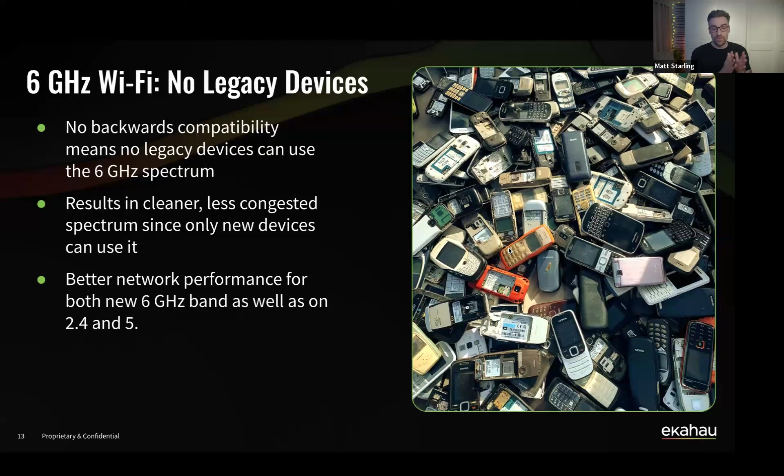When it comes to security in 6 gigahertz, WPA3 and protected management frames are mandatory. And you go from using WPA2 pre-shared key in your personal networks to using SAE, which is more secure as well. So it enforces things like this, which means that your client devices are going to be more secure, less susceptible to deauthentication attacks from people trying to get your client devices off the network. And it's going to make not only an improved Wi-Fi network, but a more secure Wi-Fi network as well. So lots of benefits for moving to 6 gigahertz.

And then I wanted to talk about Wi-Fi 7 because even recently Cisco just announced, I think 2 days ago, their Wi-Fi 7 access points. HP Aruba have got their ones out. Juniper Mist, Extreme, Ruckus, etc., all have either announced or launched their Wi-Fi 7 capable access points. And even the latest iPhone 16 supports Wi-Fi 7. So if your metric for measuring client devices on your network is Apple like me, then yeah, from iPhone 16 is Wi-Fi 7, iPhone 15 Pros is 6 gigahertz Wi-Fi 6.

So what's new with Wi-Fi 7? So first of all, if we just quickly talk around multi-link operation, and effectively, if you think about a traditional Wi-Fi network before Wi-Fi 7, how that would operate is you'd have a client device connecting to an access point on its radio, but it'd be on a single radio. So if you connect on 5 gigahertz, you'd be having that communication on 5 gigahertz.

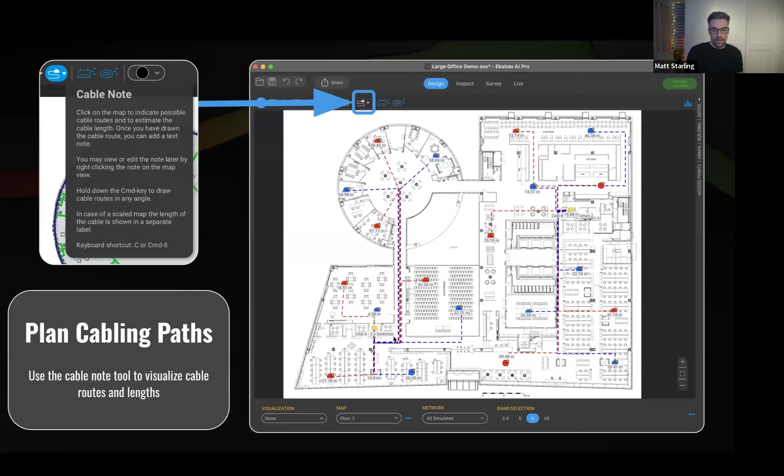So I wanted to give you a quick way of visualizing an outage when you can plan that in Ekahau. So what I've done here is I've effectively done half the APs in red, half the APs in blue, and planning for the red APs to go to one switch and the blue APs to go to another switch. And what you can actually do in Ekahau, which I think is probably one of the least known features or least used features in Ekahau, is you can actually plan cable lengths and cable runs using the cable note feature. So I basically just simulated having two cabs with two switches, running blue cables to the blue APs, running red cables to the red access points.

Does anyone in here currently use the cable note functionality? Or was it just me that likes to draw pretty cables? I don't know.

Yeah, and now we're bringing up 2.4 gigahertz. Unfortunately, 2.4 is here to stay in most of our environments for at least the near future. There are just too many IoT devices that rely on 2.4 that can only do 2.4, and they're usually, at least in my experience, security devices or some type of HVAC or something that no one really touches. No one really knows that it's even existing until it doesn't work. And then you have to troubleshoot and try to figure out what the heck this device is.

But there are a lot of environments where 2.4 is still around. So when you're designing your wireless networks, you still have to think about 2.4. You still have to keep that in mind and support the legacy devices, unfortunately. Yeah, definitely seen that a lot.

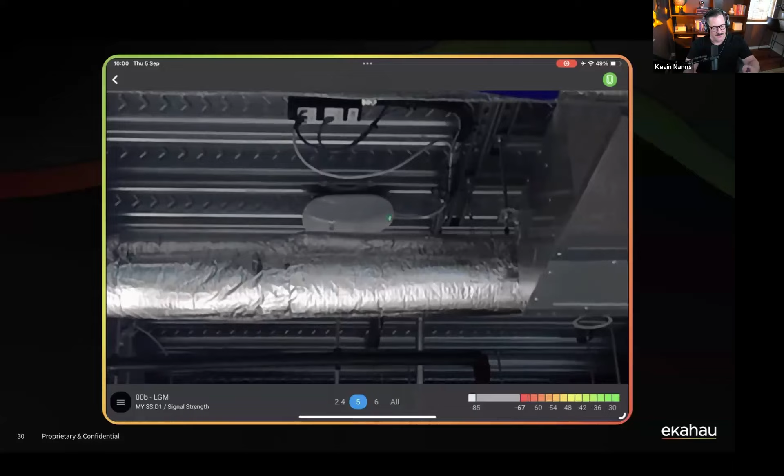There's been many a time where I've come in to do the active survey afterwards and found an AP placed exactly where I told them to, but there have been additions that were not on the blueprints. There's been duct run across, a cage, some kind of interference, an AC unit right next to the AP, that kind of stuff that can just kill your design.

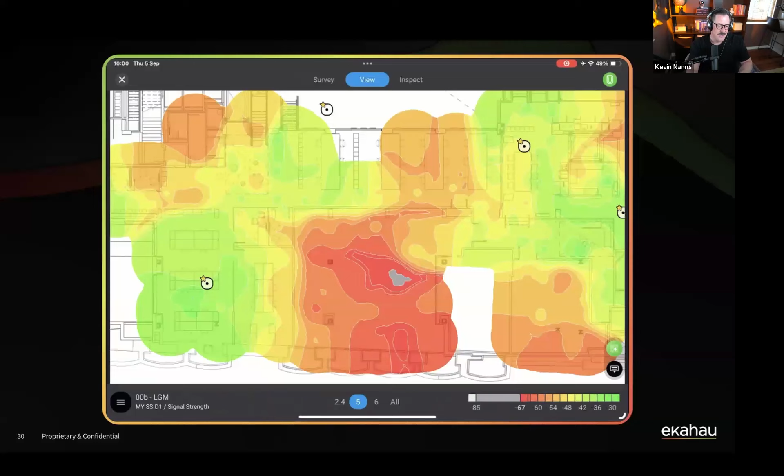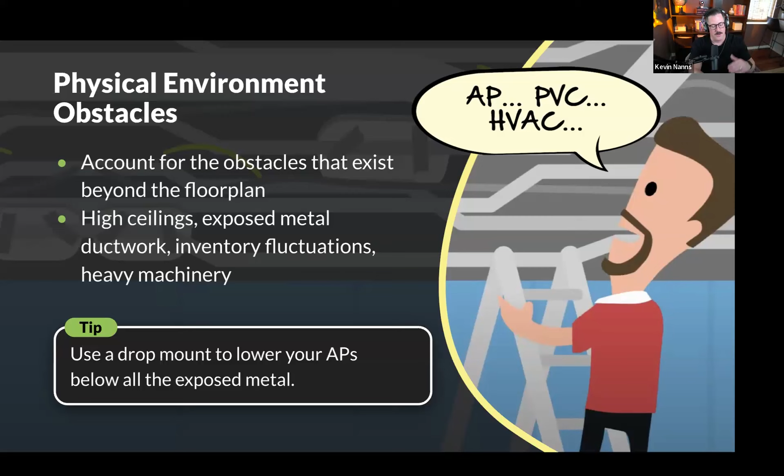And so going back and doing an active survey and looking for obstacles, looking for things that are exposed and causing interference is really important. And there are certain ways to get around that, such as using a drop mount, as I said, to lower it below the obstacle and that kind of stuff. And that's really important, especially with the new APs coming out. Mm-hmm.

And scheduling downtime. I say this all the time to my coworkers who are afraid of doing stuff, that you can't make an omelet without breaking eggs. And leadership has to know that. Users have to know that. If they want the newest things, if they want upgrades, if they want to have stability in their network, they have to have some downtime. And scheduling that in your environment could be very, very difficult depending on your environment.

If you're in healthcare, or like I have fire stations and police stations. I work for the government. So I have different things that really can't go down, but they have to. So it's balancing that, doing your change requests and having leadership back you up, but it can be very, very difficult. When you're doing these upgrades and you saw how much could be involved in your environment, you're going to have to let leadership and management be aware that things are going to go down, there are going to be outages.

For sure. So let's take a look at how you can use Ekahau to plan towards upgrading to a 6 GHz network, whether you've got an existing 2.4 and 5 network, or you just want to design a brand new network from scratch. The two different approaches you can take with Ekahau are based on either measured data or traditional predictive modeling. And I'm going to give you some live demos of both.

But first of all, if you've got an existing network, an aging network that's just 2.4 and 5 GHz capable, how do we plan to upgrade that using this method? Well, a redesign is always going to start with a survey. And with Ekahau, we have multiple different survey methods to collect the data.

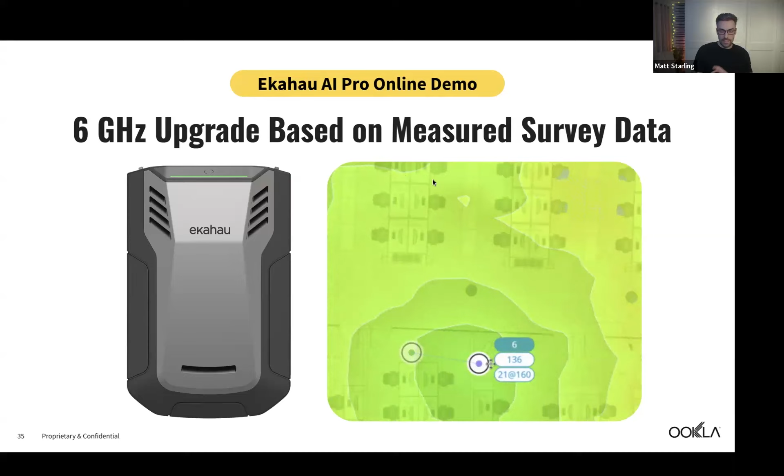So if you're not familiar with our new cloud landing page, I just wanted to give you a little bit of a tour on how you can access getting into AI Pro Online, because it does look a little bit different now when you first log into your account. You see all of our different apps up here. You have these tiles that you can either start a new project, continue where you left off, jump into Optimizer, or go into Insights to look at all of your projects.

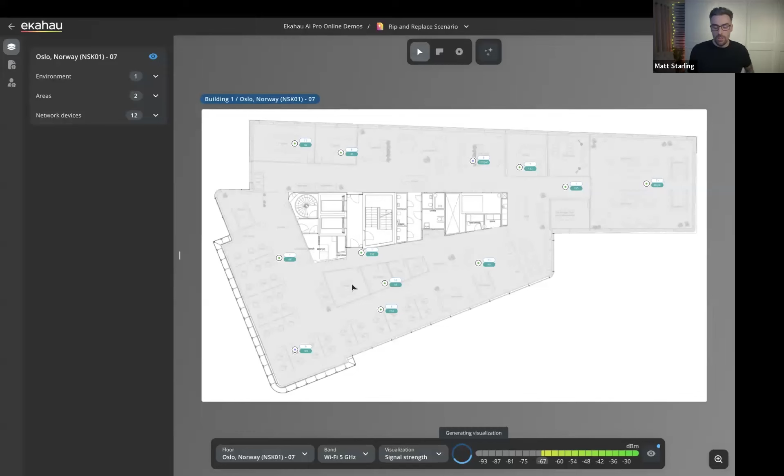But what I want to do is go into AI Pro Online. So I just simply click on that. It's then going to open and take me to here. And what I actually wanted to show you is a rip and replace scenario. So we've got a nice simple office here, and this is just pure measured survey data. So I've only done a survey, there's no walls drawn, there's no obstacles or anything like that.

The access points, they are HP Aruba ones, and they currently just support 2.4 and 5 gigahertz. And that's what we see down here in the bottom. So typically, if I wanted to simulate upgrading to a 6 gigahertz or Wi-Fi 7 capable access point, what I would have had to have done is import this into Ekahau AI Pro, our desktop, scale, draw walls, update the attenuation of the walls to be accurate, to reflect what we've got on site, and then place the simulated access point.

However, using this new methodology of just walking around with the Sidekick 2 and then uploading it to AI Pro Online, we use our AI machine learning to understand how RF propagates in your space, and I can now plan for changes without having to do any kind of manual work like drawing walls and stuff myself.

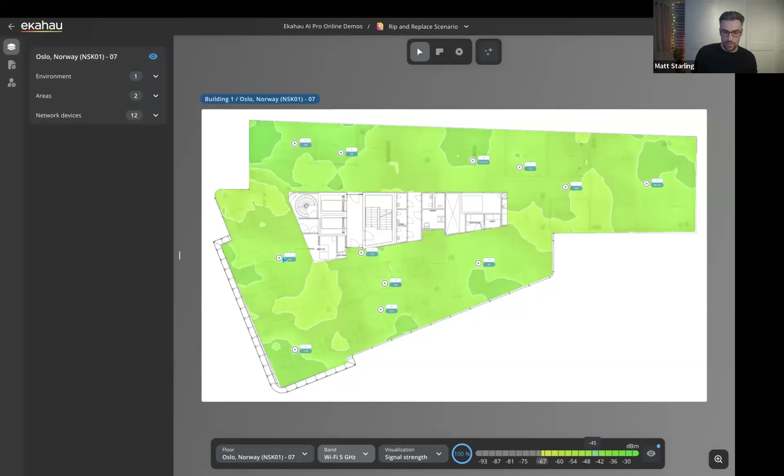So what I can actually do is maybe I need to relocate this access point. Maybe I want to move it from here into there. I can literally just grab it, move it, and put it anywhere I want, and you can see the heat map changes and it updates in real time, purely based off that real measured survey data, which I think is very cool. And if I decide actually, you know what, I don't want to install it there, I can put it back to its original location by hitting reset device and it will jump back there.

But what I want to show you is simulating that rip and replace scenario. So what I can do is just come into here, grab all of these measured access points that we found, and then I can actually ask Ekahau to replace them with a different model Aruba access point, and perhaps I want to change it for the 755.

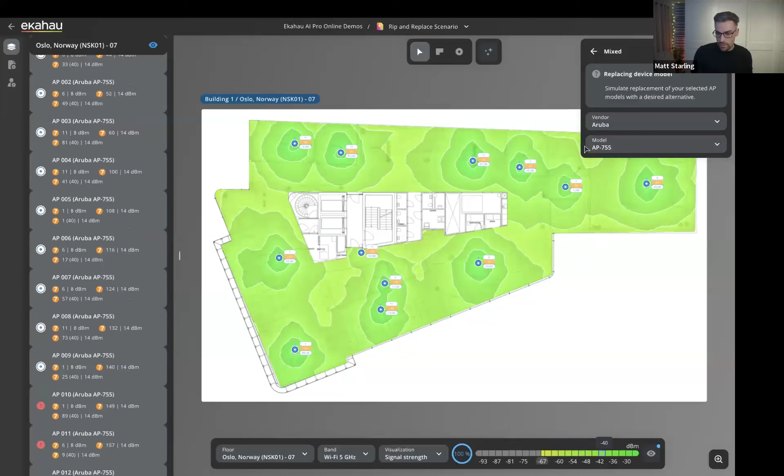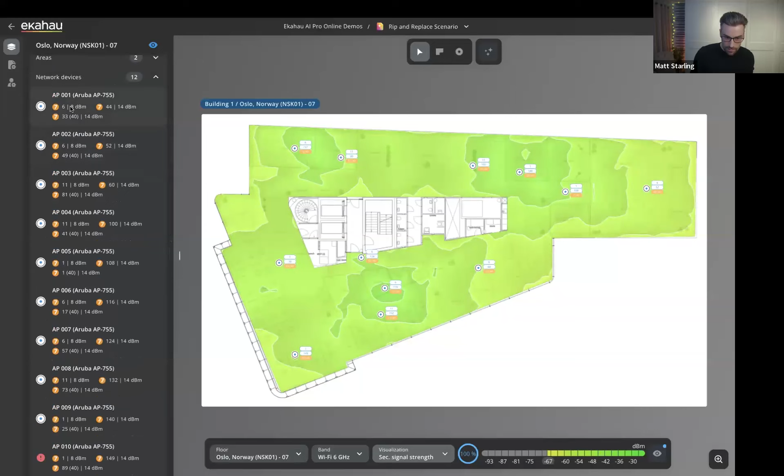So if I click on that, what you'll notice happen straight away, hopefully you saw that, all of the APs swapped, and now we have 6 gigahertz simulated data, even just from the 2.4 and 5 gigahertz APs that were there. So we can actually predict and show you what 6 gigahertz coverage is going to look like and see if this meets our primary coverage, does it meet our secondary coverage requirements? And also, notice on the left-hand side, we have the Wi-Fi 7 icons, so you can design for your Wi-Fi 7 APs.

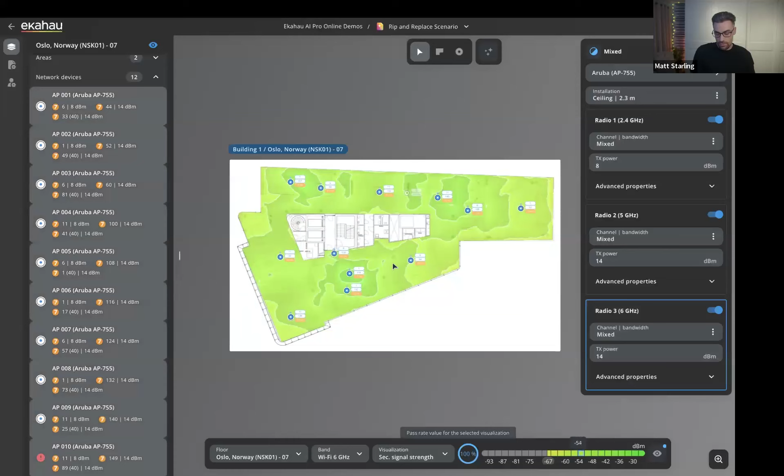And again, if I wanted to, maybe I don't want to have this access point over here. Maybe I want to move it to this location. I can still move the access points around and plan and account for changes in the space if I wanted to. Also, what I can do is I can actually just delete all of the access points, and I could just design the network from scratch using whatever model AP, but we'll stick with Aruba because why not? And their 755 AP, and I can just come in and place my access point and just move it around wherever I want. And what you'll see is these suggested locations that come up as well.

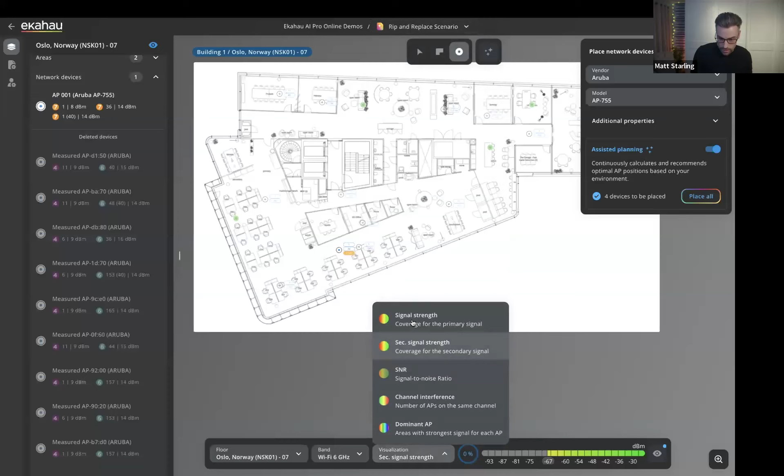So that's one method that we've got for designing and upgrading to a 6 gigahertz Wi-Fi network. Oh, sorry, you don't see any signal strength there because I've got it on secondary. And I can again just move APs around and plan for where I want to place access points using this method. Or perhaps you want to just design a network completely from scratch, or maybe you haven't got access to the site yet to do a Wi-Fi survey.

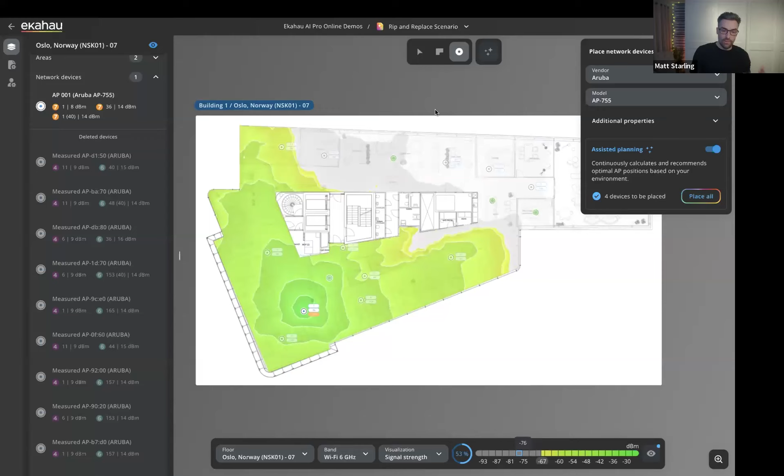So what I can actually do is I can come into here, click on the new project, and let's call it Ekahau webinar demo. And that was in Norway.

That site, but I'm in the UK, so let's pick the UK, and then I'm going to hit continue. And actually, I'm going to give you all in the audience a chance to choose what we want to design for. So I've got 4 floor plans here. They're all either PNG files or a JPEG file of a hotel or some different hospitals. So which one would you like me to use for our traditional method of designing?

So we've got hospital floor plan 1, 2, or 3, or we've got a hotel floor. Okay, hospital plan 2, hotel, hotel, hotel, H1, hospital 2. Okay. There's a lot of people putting in some options there. Is there a pub? Maybe if you send me a floor plan of a nice pub in the UK, we can go with that. So I think a lot of people wanted either the hospital floor plan or the hotel. Kevin, you can have the final decision, this one or this one. What would you like? I'm thinking hotel. Hotel? Okay, we're gonna go with the hotel.

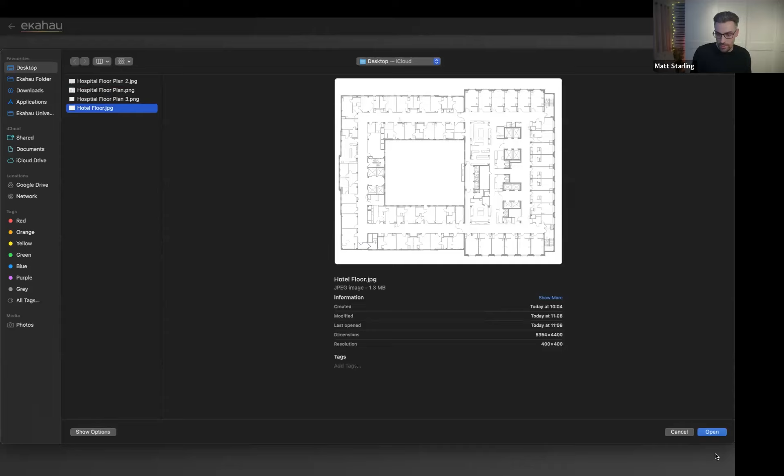So I'm going to simply hit open and it imports. And then the first thing I need to do is give it a scale. So I know I'm going to do something very bad here. I shouldn't use a door to set my scale. We should use something longer and proper, etc. I agree. Don't do what I'm doing. When I go there, I would measure it, of course, but I don't have anything else to scale it better. So please don't judge me too much.

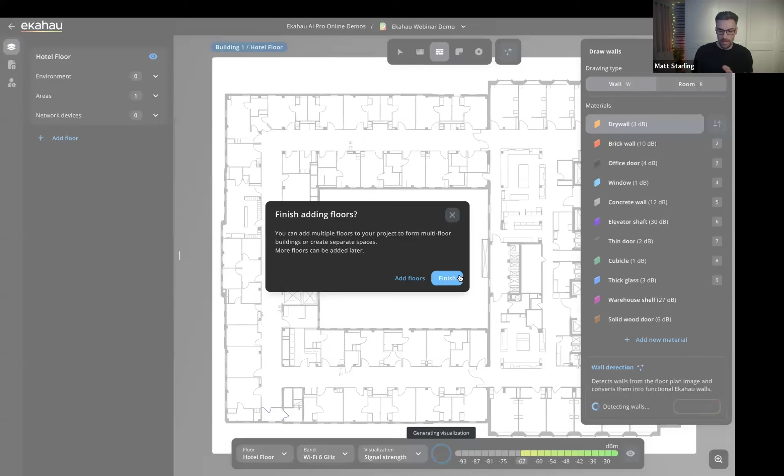So I'm going to hit finish now because I don't have any other floors of the hotel. We're just going to design for this floor. But remember, this was a JPEG file. So I'm just importing a JPEG. And the reason why I want to highlight that is because I have a question for you all. If I was to draw all of these outer walls and interior walls and doors manually myself now, how long do you think this would take me? Or actually, how long do you think it would take you in the chat?

Days, an hour, 80 minutes, too long, 20 minutes, a friggin' day, an hour. Okay, so a lot of people were saying various times. Maybe we're finding out in the chat who gets paid by the hour here. Some people saying this will take a whole day to draw all of these.

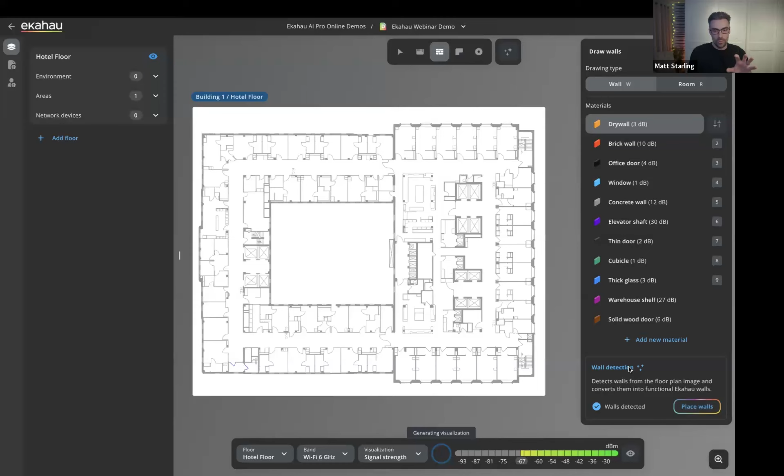Okay. The reason why I wanted to highlight that is because now, did you see our wall detection has finished? It's looked at the floor plan and it's detected the walls. And now if I just simply hit place walls, all of the walls have now been drawn for me. And we picked this floor plan completely at random. If you had a CAD file or a PDF file that has the layers determined properly, we could have imported that, read those layers, and then drawn the walls for you. And we can still do that, of course.

But I can probably count on one hand, out of all of the hundreds or thousands of Wi-Fi projects I've worked on, when I've actually got good CAD files that I can actually use. Most of the time, I end up converting either CAD to a PDF, PDF to a high-res PNG or JPEG like this. And this has now saved me a whole bunch of time.

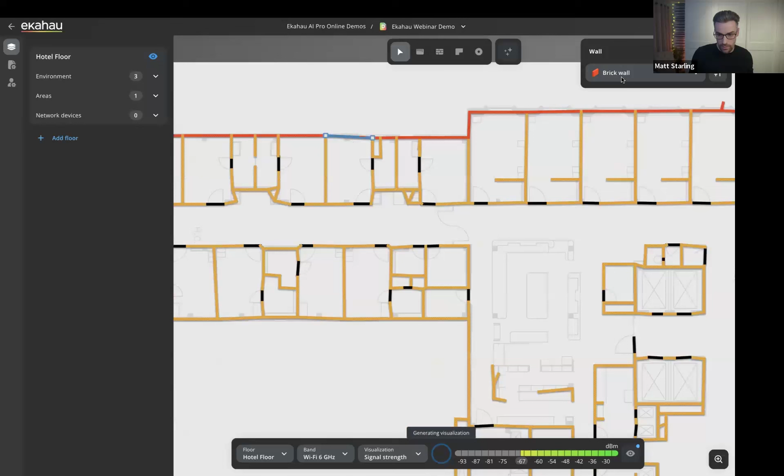And of course, we're making some assumptions here. We've drawn brick wall for all of these outer walls. If I click on this, you can see it's a brick wall. And then interior walls, it's a drywall. And look, we've even drawn the doors. That's pretty damn good, I would say.

And of course, some of the things are not 100% perfect. There are probably not any walls here, but I can just come in and get rid of them. And I could add some, like it's missed these doors here. Great, fine, no biggie. It's not going to take me any time at all really to come in here and update these walls and change a few things as and when I need them. So this is going to be a huge time saver for you if you're working off of PDF, PNG or JPEG files, which I personally think most of us probably are.

Stop improving the workflows, we charge by the hour. You can still charge by the hour, but now you can just do something else instead, like watch Netflix whilst you said you were taking 2 hours or 2 days to draw these walls.

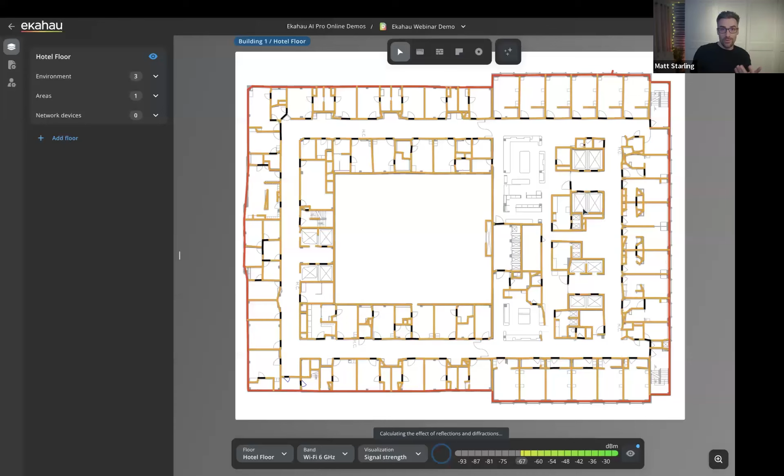Next thing that I would do is I would define an area.

So I would tell Ekahau, hey, this is where I want to see the coverage, so I can move this area in and I can tighten it a bit to be just specifically around where I want to see the coverage. Or I can just ask Ekahau, hey, place these areas for me. And when I do that, it automatically snaps to my actual floor plan area. Again, I think that's super nice.

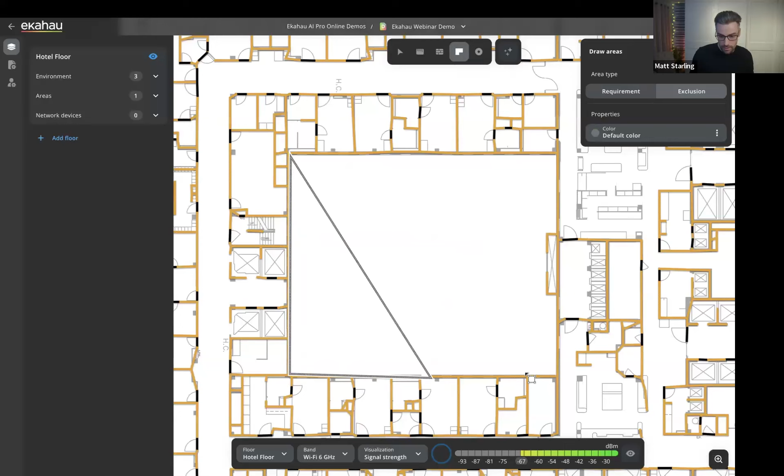And then the last thing that I would probably do quickly is just go to my exclusion area, come into here and just define where I don't really want to see the coverage, like this big atrium or courtyard. And once I've done that, I've now got my exclusion area defined. I can now come in and start placing my access points.

So Cisco announced recently their Wi-Fi 7 APs. Why don't we design for Wi-Fi 7 in Ekahau? Because we can, and so can you. So I can just come in here, pick one of these Wi-Fi 7 access points. And then what you'll notice has happened is we have this thing here called an assisted planner, and it now says that there's 13 devices to be placed.

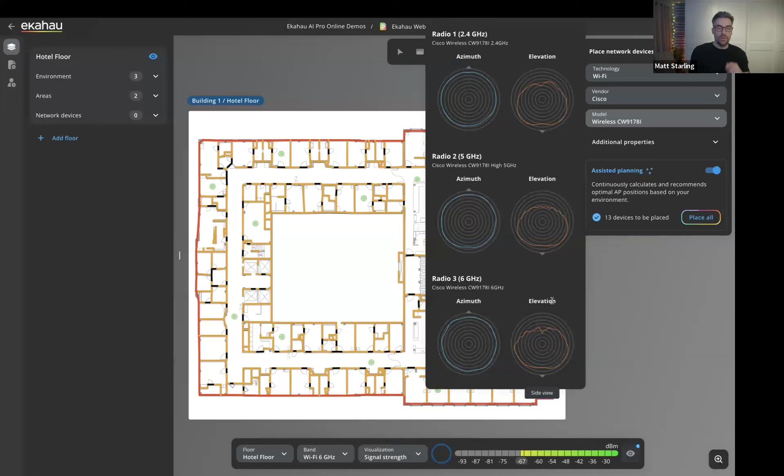A couple of things I want to highlight about the assisted planner: number one, the algorithm is actually based on the specific AP that you're planning to use. So the suggested locations will change depending on which vendor AP and model AP you go for, which I think is really nice. The other thing as well is you can do it completely automatic, and we can place all of these APs at the same time if we want.

Or however, I could come into here, place an access point in one of the suggested locations. The other thing I just want to highlight is if I look around here, it's not suggesting to place the APs in the corridors, it's suggesting to place APs in the room, which I think again is really nice. Probably not put one in the lifts. I should have made that an exclusion area, but that's my fault for not drawing additional exclusion areas.

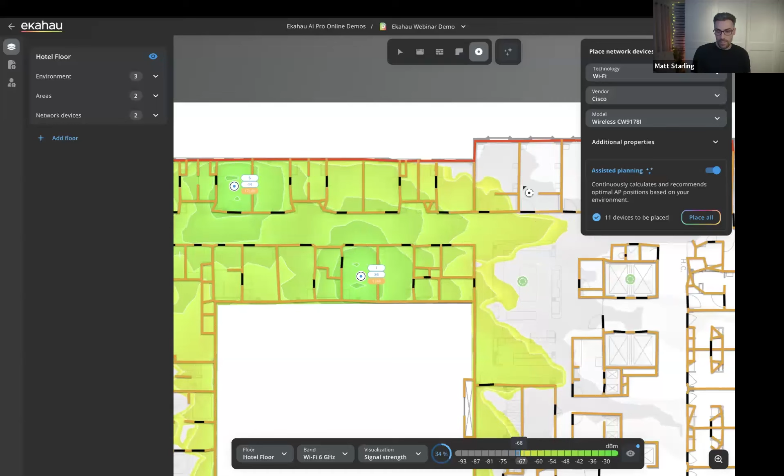But the other nice thing that our assisted planner does is if, let's say, for example, I can't place an access point in this room for whatever reason, I can't get a cable there, I can't mount there, whatever. If I just place an AP next to it, the assisted planner will look at that, it'll recalculate and make more suggested locations for you. So it can be fully automatic, it can be semi-automatic, or you can just place APs however you want to meet your requirements.

Or I can just go ahead and place all of them. And then, yeah, I would probably not put one in the lift. That might be a little bit tricky, but I blame me for that, not putting the exclusion areas there, which is what I would have done, and again in this stairwell.

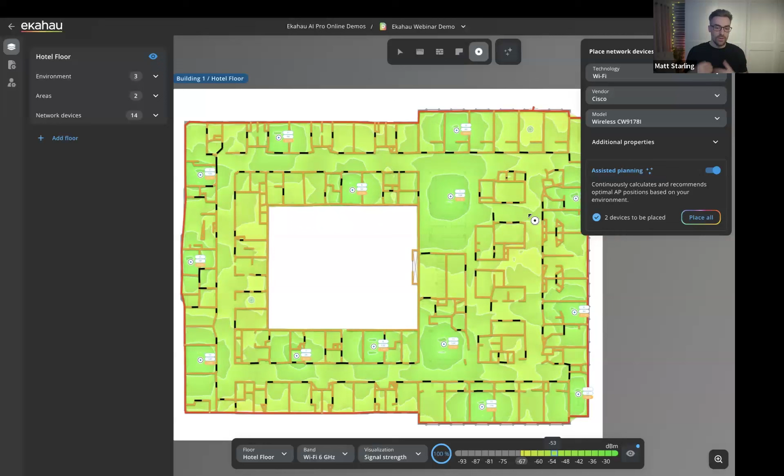But you can see in just a matter of moments, we can now have a really accurate predictive model based on that traditional method of Wi-Fi designing: uploading a floor plan, setting a scale, drawing some walls, adding our areas, and then placing access points. And we can see this for our 6 GHz access points. And the other thing that I just wanted to point out, when you're doing this kind of simulation, why scaling is so important is because we use a formula that's called free space path loss.

So effectively, if I just turn on this access point, there's a natural degradation from the radio as the transmission is powered out from the radio. It's going to degrade naturally over time and over free space. And what we typically do is we calculate that loss, but then we would also subtract the different levels of attenuation that you have throughout your building. So drywalls are 3 dBs here, doors, etc. So we subtract the attenuation from the radiation pattern coming from the AP based off that free space path loss.

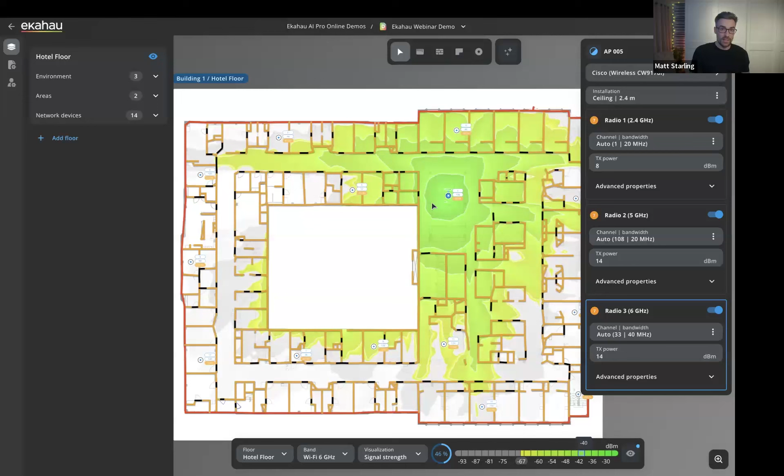But in the real world, there's other things that happen to our RF waves, such as reflections and diffractions. So the radio waves will bounce off of materials and they'll bend as they pass through certain materials as well. To calculate reflections and diffractions is quite a complex thing to do, and it's actually on by default. So the heat maps that you're seeing are actually calculating from free space path loss, subtracting your attenuation values, and also doing reflections and diffractions. So I think that's a really nice thing that you can see here.

So you can try this out yourself. If you've got access to AI Pro Online, the Wi-Fi 7 APs are live in there from today. So go and try Aruba, Extreme, Ruckus, Cisco Wi-Fi 7 access points, and you can see them in Ekahau AI Pro Online and try it out for yourselves.

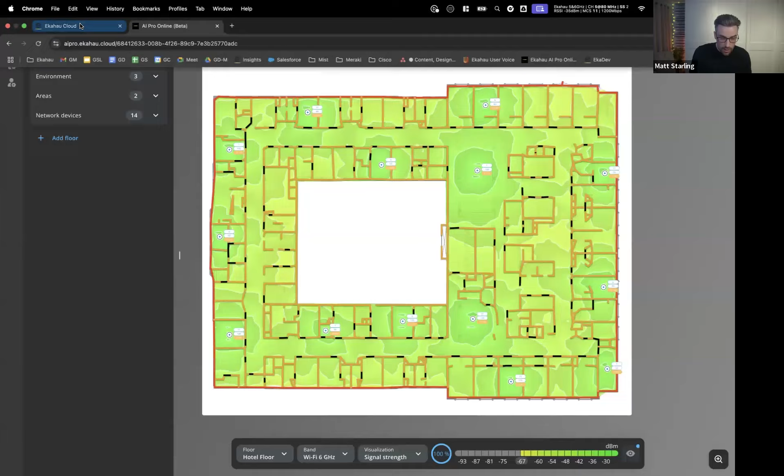Let me jump back to the cloud because I wanted to show you how we can optimize an existing 6 GHz Wi-Fi network. So we did a survey of a college recently, this one. If you're not familiar with what Optimizer is, it basically is your little Wi-Fi expert best friend that can sit in your pocket. Once you've surveyed your environment and uploaded it to the cloud, if you push that data to Optimizer, it will automatically analyze your specific network against your specific requirements and then give you step-by-step recommendations on ways that you can improve your Wi-Fi network.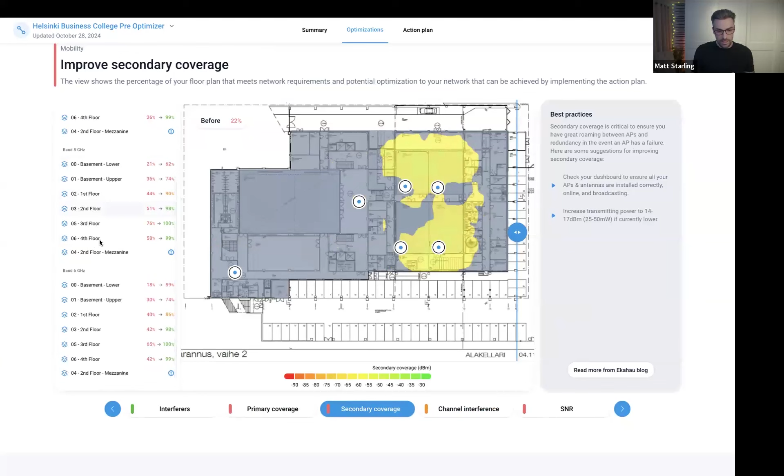So in this example, we had actually played around with the network before we did the survey. We made things pretty bad to see if we could find all of the issues with the environment, and Optimizer provides us these cards. If it's green, we have no issues. If it's amber, some things we want to try and solve if we can. But if it's red, then we've got some big problems there. So if I click on that, I can see even on 6 GHz, on the second floor, because of the access points' radios and transmit power they're using, there are some big issues with secondary coverage.

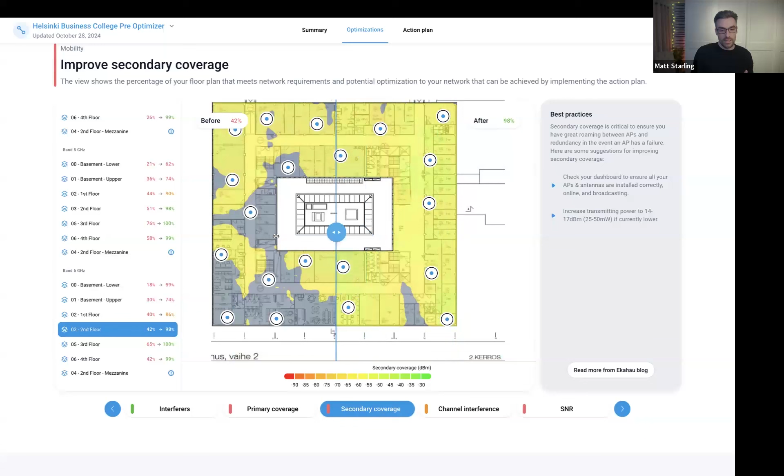However, if we were to implement the changes that Ekahau is recommending, I can slide the slider and see the massive improvements it's going to make. Things like coverage and channel interference, because they did have quite a lot of channel interference here because it was using super wide channels. I can show you the channel widths here, like mixed channel widths on 5 GHz and 160 MHz wide on 6 GHz. Probably not what we want to be doing over in the EU.

The nice thing about Optimizer that I wanted to highlight is that we don't just look at the heat maps that you would expect. We'll actually analyze how your network's configured. Is your SSID configuration in line with best practices? Your security, your minimum basic rates, et cetera, and give you a nice table to see that. If you want to see the exact recommendations, you just click on view all changes, and all of your different access points and recommendations are here. Download the report and share it with whoever's going to be making the changes. That's a really nice way of improving your network, so I definitely recommend checking out Optimizer if you haven't yet.